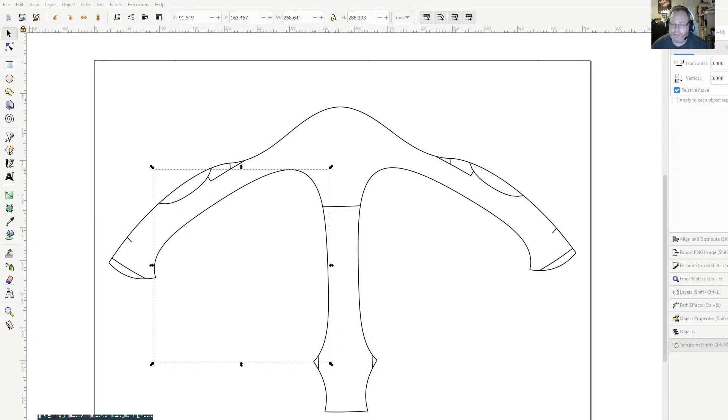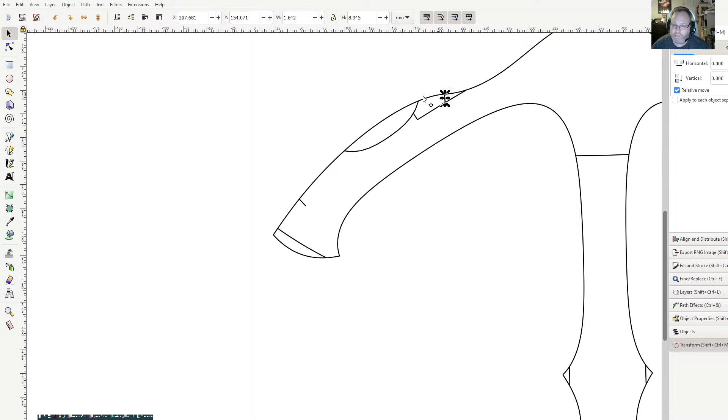These are the overlap pieces. These are some pieces I went in and added these little marks, these long registration marks, like right here and right here. These indicate where part 1 Charlie begins. So 1 Charlie 1 begins, 1 Charlie 1 ends. So this is part 1 Delta. 1 Delta goes around to here, 1 Charlie 2 all the way to here. That'll help when we're making our registration marks to align this with those parts.

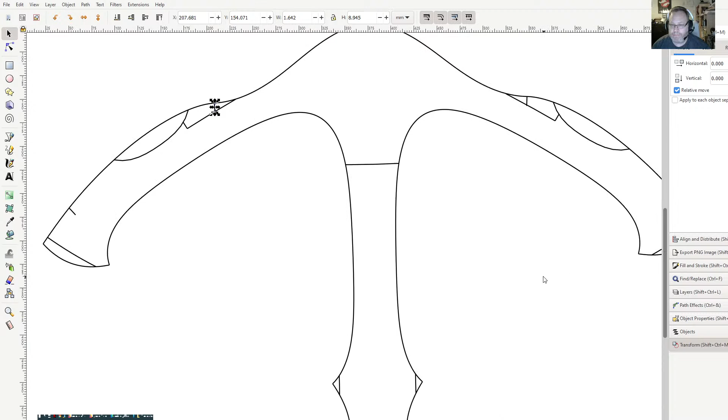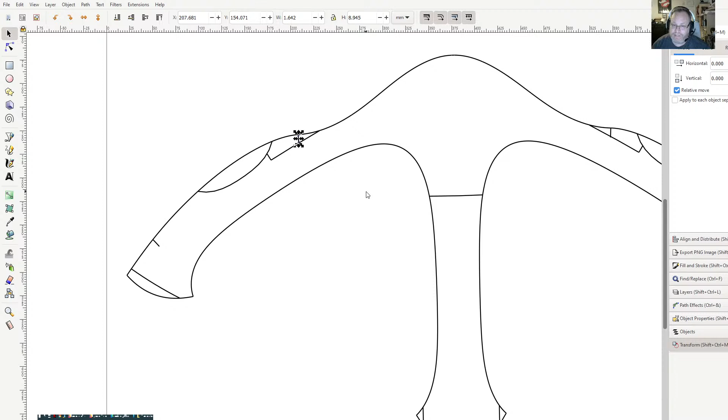But part 1 Bravo 1 sits right inside here, and part 1 Bravo 2 sits right inside here. So what we're going to do is add some registration marks along this to allow us to put these two pieces together and form the three-dimensional shape that we had modeled. If you recall from SolidWorks, this cut right here, we intentionally made this cut so it would be running down the middle of the relief, right along the relief cut that we put in 1 Bravo 1.

And we did that so that we could start our registration marks and work our way around here. And then when we go to part 1 Bravo 1, as long as we just start on one side of the cut and work our way around, it'll be the same.

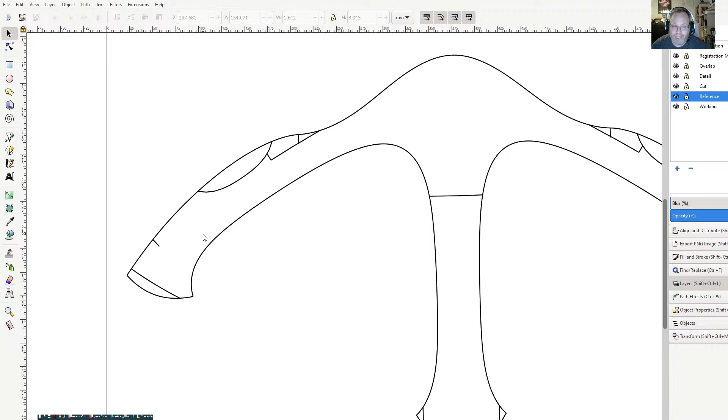Now I have already measured this in SolidWorks, but if you wanted to measure it, let's go ahead and isolate it. We're going to Control D to make a duplicate, and move that down to our working layer. Go ahead, hide that, and then open that. So we've isolated just this curve right here. Go up to Extensions, Visualize Path, Measure, and just take a preview because we just want to peek. 600.62.

I usually like to get about 40 millimeters if I can between my registration marks. It's like 1.75 inches-ish. So if I take 16 registration marks and take that dimension. In SolidWorks, I measured it and I got 600.65. So to split that up into 16, that's 37.54. Let me look at what I got for this again. This might have gotten a little bit smaller.

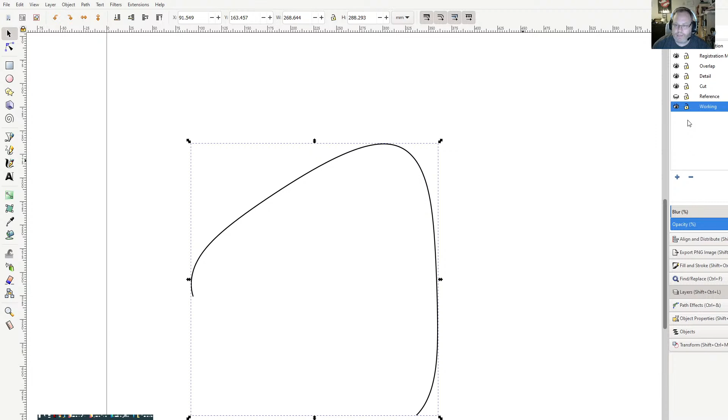Yeah, 600.62. Now, just out of morbid curiosity, I may have been looking at it backwards in SolidWorks. Let's see if this one isn't a little bit longer. Control D to make a duplicate, move it down to the working layer. Let's do an extension, visualize that path, see what we get. 600.07. So even different. So we'll use what we got here: 600.62 and 600.07. So you see there is a smidge of difference between the two. Less than a millimeter, but it's still there. So it's not perfectly symmetric.

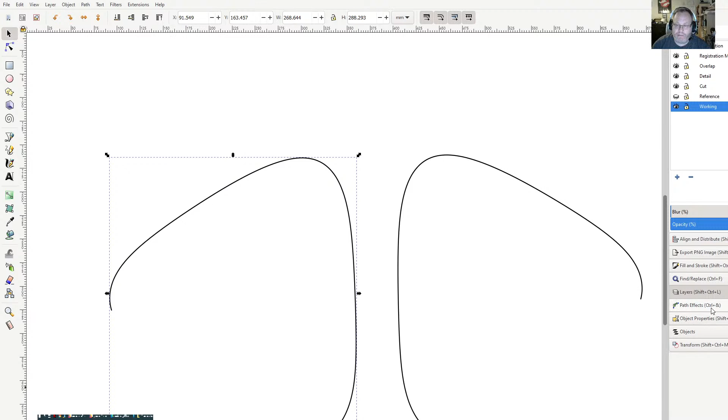So for the registration marks along here, for 600.62, if I divide it by 16, I get 37.54. So we are going to use a path effect. Here's my path, and provided it is a path, I'll be able to do this. Go Path Effects, Add, Ruler, measure in millimeters, and as I calculated, 37.54. And just as a matter of personal preference, I like to have about 5 millimeters on it. You can set a major length and minor length. I want them to be the same because I don't need to distinguish.

And it looks like they're already on the correct direction, left or right. This is the way we want them. Okay, so that's 16 registration marks. We worked our way around. So just for comparison, let's grab part 1 Bravo, throw it in here. All right. We don't care about any of that.

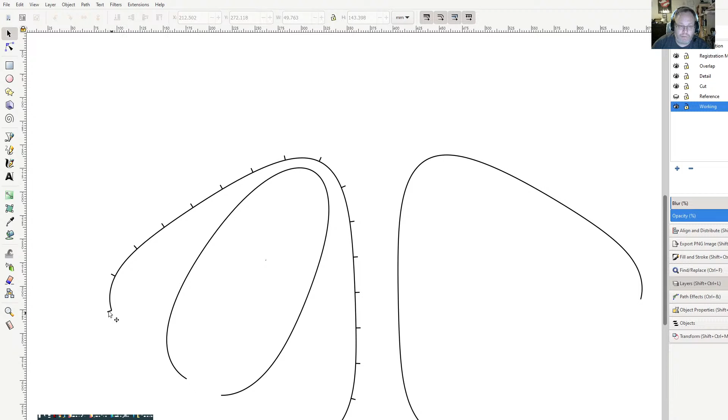So this part has 16 divisions. We're going to need to get 16 divisions on this part as well. So let's go ahead and measure. 599.49. Now, a keen-eyed observer will note that they're different lengths, and that's okay. Part of stretching or compressing to get the shapes to go together is how we impart forces into the flat surfaces to get our three-dimensional shape.

So just doing the quick math on that. I've got a spreadsheet up that you guys can't see that I just use. I like to keep track of what I use. So 37.47 is what we want for this one. So path effects again here.

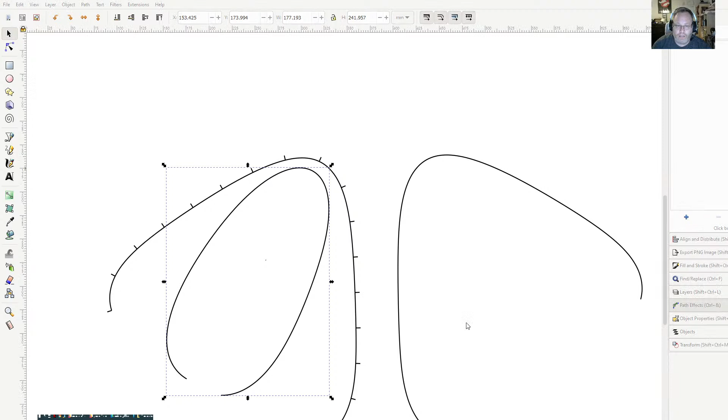Now this, you can actually reverse the direction this is going. So this says the marks are on the left, which means they're on the inside. So if they're on the left, it means the direction of the path is from here to here, because that puts these on the left. I can actually reverse that if I want by going up there.

Sometimes, depending on how you're doing it, you may want to change the path direction. But for this it's unimportant because our registration marks are across one solid path, and they're already pointing in the correct direction. So we'll go 5 millimeters there.

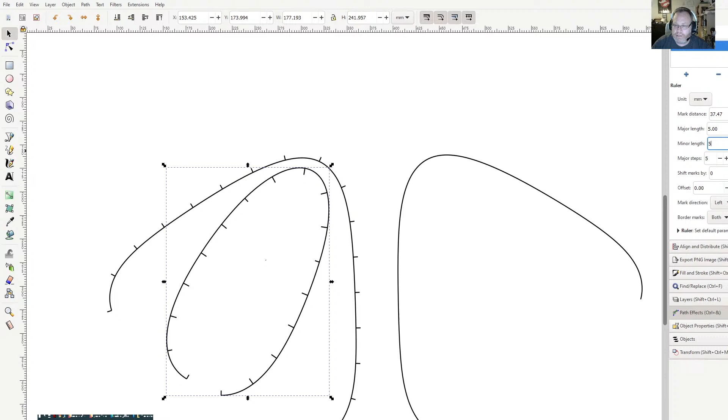And there we go. We've got 1 through 16 registration marks.

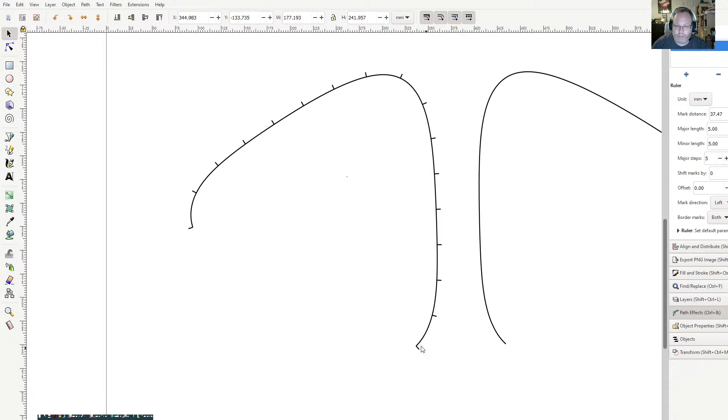I like to isolate the registration marks. I'm not going to leave them as an object in Inkscape, because this is not an SVG, not in a format you can export or really use.

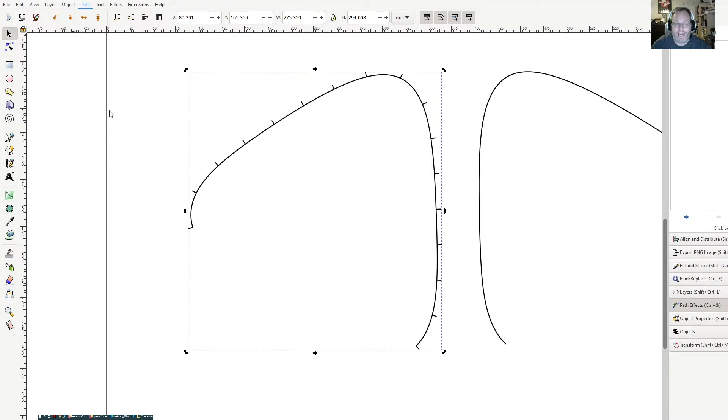So what I'm going to do is go object to path, and you'll note the path effect disappeared because it's no longer an object. It's now a path with individual little spokes on it. Then we'll go path, break apart, and that makes all of these individual.

Now I can delete that line, which is part of the reason I duplicated it. You'll note some of these registration marks occur at geometry changes, like here and here, so at the end of the day we won't need those. Let's go ahead and delete them.

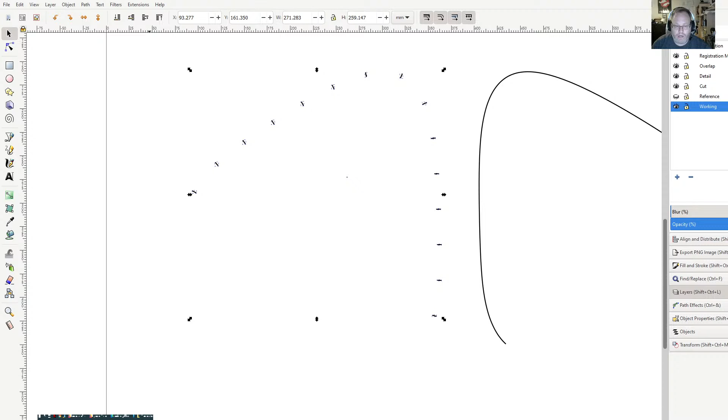We'll select these, holding shift to make them red, because that's the color I use for registration marks along seams. Then we move those to the registration marks layer, and lock it so we don't accidentally move or mess them up.

And then when you look at the part, you'll see you've got your registration marks on there. I mean, this is tedious work, I totally concede that point.

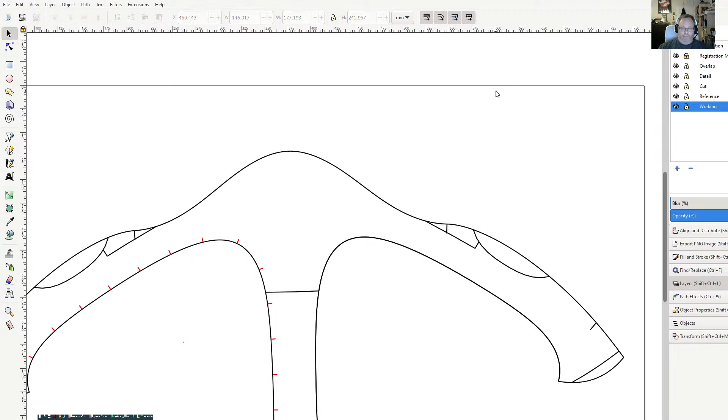But if you're not using Armorsmith and you're not using Pepakura, this is how we get the stuff on there. I just wanted to show everyone how I get the registration marks on my parts, and that's how I do it. Real quick, I'll show you how I do my overlaps.

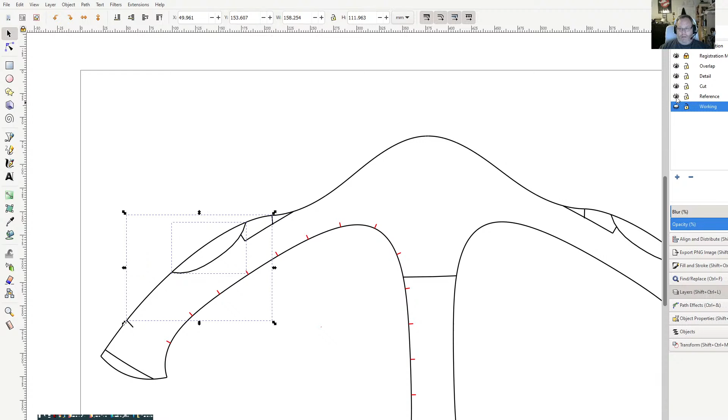So I'll take this part and this line right here, duplicate them, and move them down to my working layer. I hide the working layer to make sure I can still see this, so I know I'm not pulling the actual part. Let's go ahead and hide our registration marks too.

So what I want is for an outline of this to be a specific color. I'll go here, you'll see all the nodes in here, and we'll go ahead and simplify it with Control L.

Now sometimes when you simplify, the geometry may change a little bit and get bad or ugly. Just Control Z and undo it, and leave it the way it is.

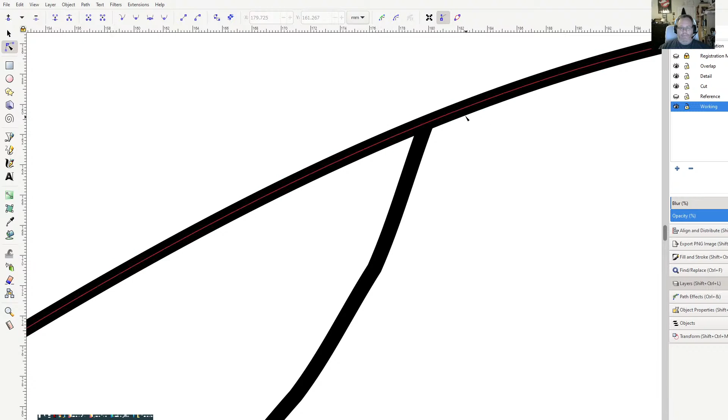But we're going to add a node here, and break apart, and we're going to add a node there, break apart. Oh sorry, I have to break it there.

So select the node that we created, break it, and then path, break apart, delete, delete. And now these are two separate paths right now, but I want them to be one path.

So let's highlight, switch to edit path by nodes, select all, combine, and you'll notice these tips are like nice corners right now. That's how we know we've sealed this path up, okay?

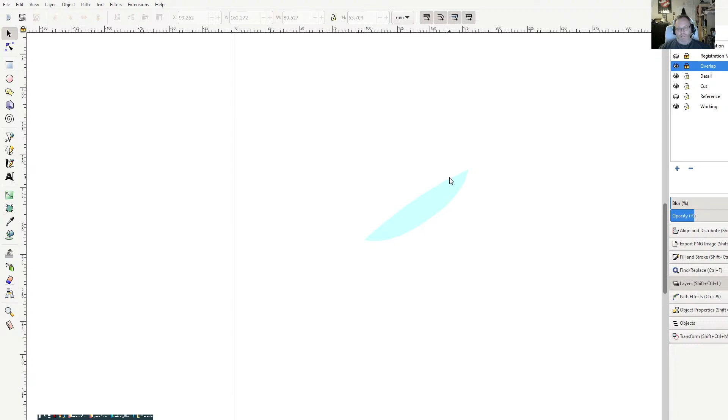And then we'll make it blue. I'll select it, we're going to make it blue and get rid of the outline. Then we move this to our overlap layer, which we'll lock, but also set to 20% opacity, so we can still see it but also see what's through it or behind it.

And there we go. Now this line will eventually go away, but I'm going to create registration marks on here for overlap first. I just wanted you to see what it looks like in the scheme of things. This will all be one big overlap for the mohawk, whereas the mohawk is not here and not here.

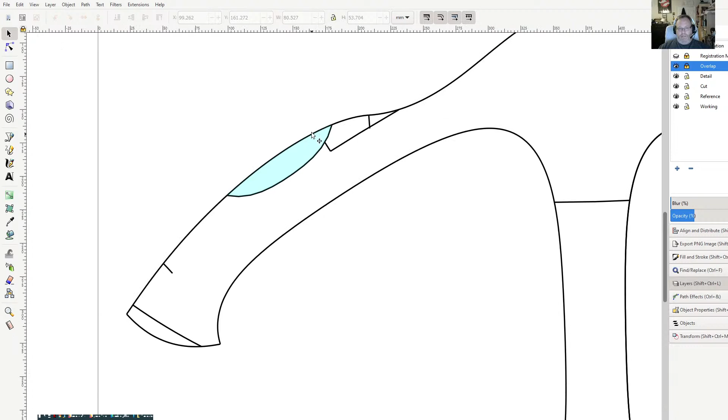But that's how I do the overlaps. I've shown you how I do the registration marks. So between SolidWorks making the surfaces, flattening the surfaces, doing projected curves, split lines, and now showing you how to make registration marks and overlaps and cleaning up your templates in Inkscape, you have all the tools you need to make your own templates.

So watching the videos, you can see that, let's look at this real quick. We've got about 6 or 7 hours in SolidWorks that we've worked. I will probably spend 16 hours or so cleaning up all these templates, adding all the registration marks and everything. So about 2 days worth of work to get us to where we need to be.